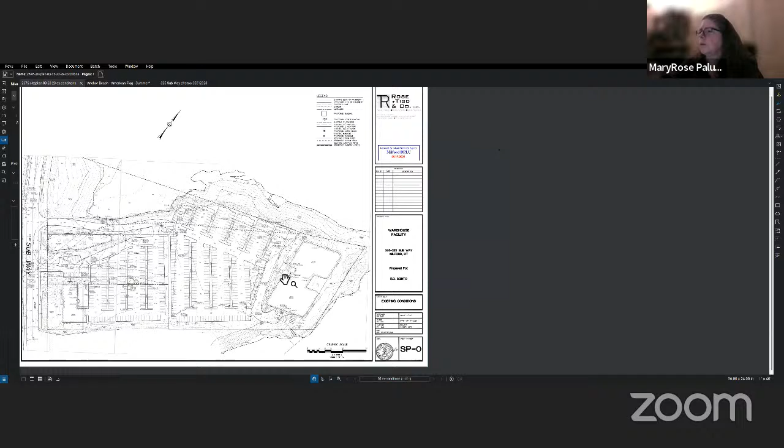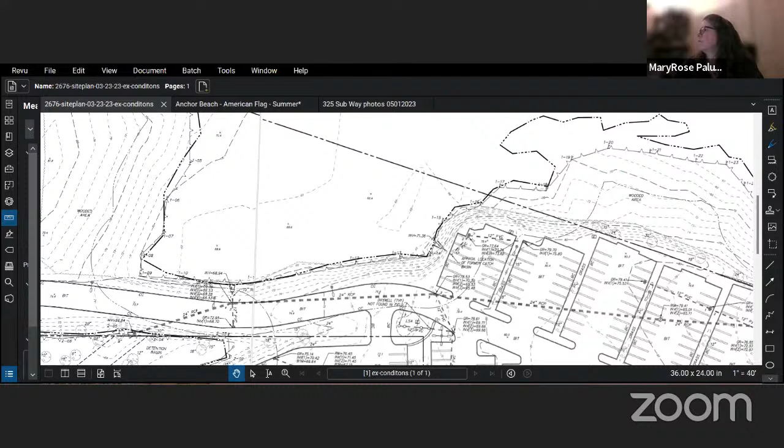Bob, we'll follow your lead, Mary Rose. Bigger, I think, yeah, I can't really see it. I don't know. Trying to get the screens arranged so you can see it. Is that any better? Yeah, that's okay, all right.

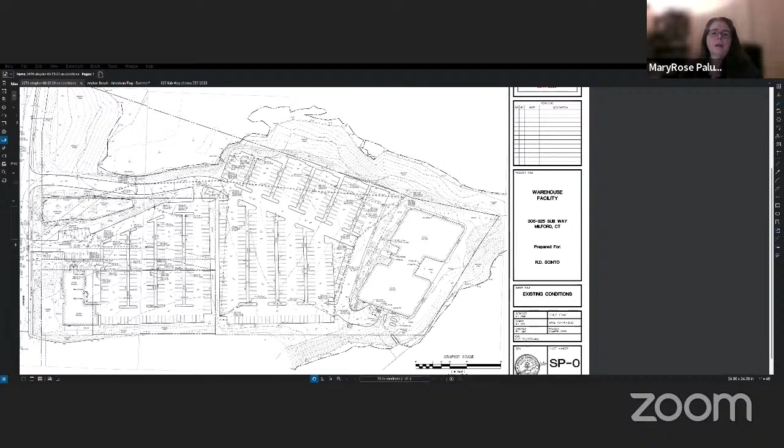All right, this is item D1, IW230030 Sub Way. Item D2, IW230029 Sub Way. And item D3, IW230028 325 Sub Way. These are three applications for one project that spans the properties at 305 and 325 Sub Way. The proposed project is for construction of a 160,000 square foot warehouse, sorry, I got the math wrong, with its proposed parking, associated grading and construction, and stormwater, within 150 feet of a wetland in the Beaverbrook watershed. The plan proposes to fill in approximately 0.223 acres of wetland currently acting as a detention area, and to mitigate that with a wetland creation. The application, site plans, and stormwater report are all in the document links on the plans and in the agenda.

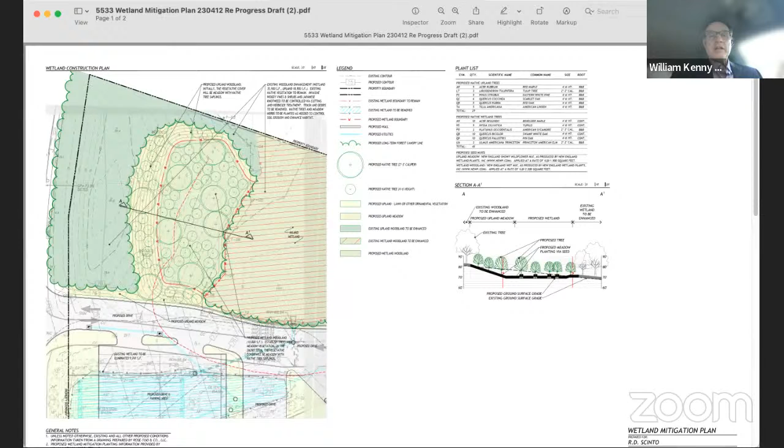However, to create that wetland, you need to essentially destroy the upland forest. So we are offering this as some mitigation, but there is another option for mitigation. We had a meeting with Mary Rose, Steve Johnson, and Jeremy to discuss that, and at your next meeting we will have additional information regarding it.

But the proposal is, rather than disturb this relatively nice upland forest, we would do work on the town open space property, particularly along the trail that circles the western pond of Mondo Ponds, the two ponds. The western pond is the smaller area—you have the larger pond on the right and the smaller on the left. There's a trail that circles that pond, and we walked that trail with Mary Rose, Jeremy, and Steve.

Bob Scinto also joined us on that walk and identified some improvements that could be done along it. There's at least one spot where you could use a new footbridge, and there are many areas where we could remove some invasive vegetation, and other areas where we could put down wood chips to make the path safer for passage. So before the public hearing, we'll provide you with more detailed information so you could compare that to the other mitigation measures proposed on site.

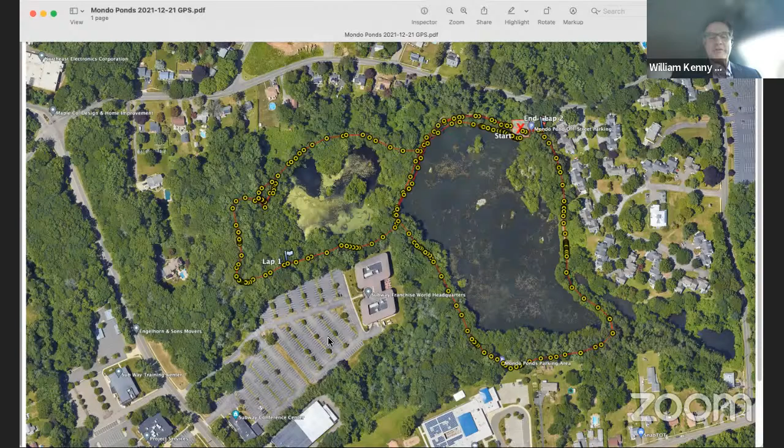And Manny from Rose Tiso can give you a more detailed description of the project development itself. Thank you, Mr. Kenny. Mr. Silva.

Good evening. My name is Manny Silva from Rose Tiso and Company. I'm a licensed civil engineer in the state of Connecticut, located at 35 Brentwood Avenue, Fairfield, Connecticut.

As Mr. Kenny explained, the site is an existing commercial site with a small building here in the corner, and then a large headquarters building near Mondo Pond to the east. Our proposal is to have a 160,000 square foot warehouse building with some parking near Sub Way, and then another employee parking area in the back, and one here to the north.

As he explained, there is an existing detention pond flagged as a wetland in this area that will be filled in. In its place, we're going to put underground storage with an equivalent volume to what this detention pond held, because there is some stormwater that comes from across the street and gets collected here, then discharged into the wetland to the north. So what we're going to do is mimic that condition with an underground storage gallery system, which will allow water to pool and infiltrate into the ground and into the water table, and also allow it to be treated through the media of the ground or soil that's there today, feeding the wetlands to the north and Mondo Pond to the east.

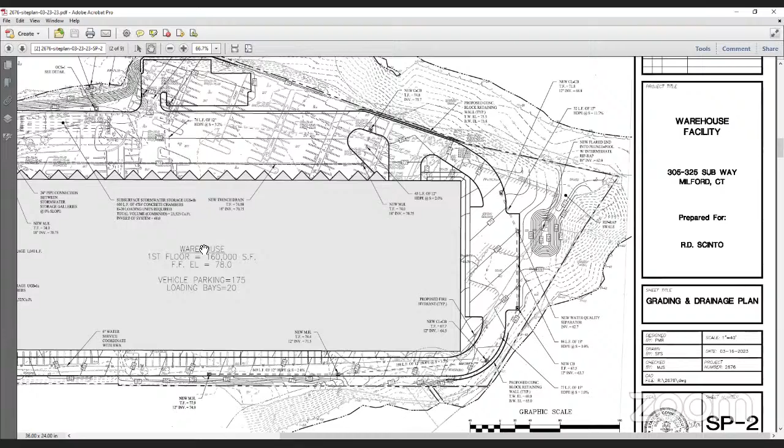And then it has an overflow, which is over land, and that will also go to Mondo Pond, similar to the hydrology of the site currently. So we're trying to mimic the hydrology of how Mondo Pond gets fed and spreading it out throughout the site. But we are collecting it, storing it, and then infiltrating it.

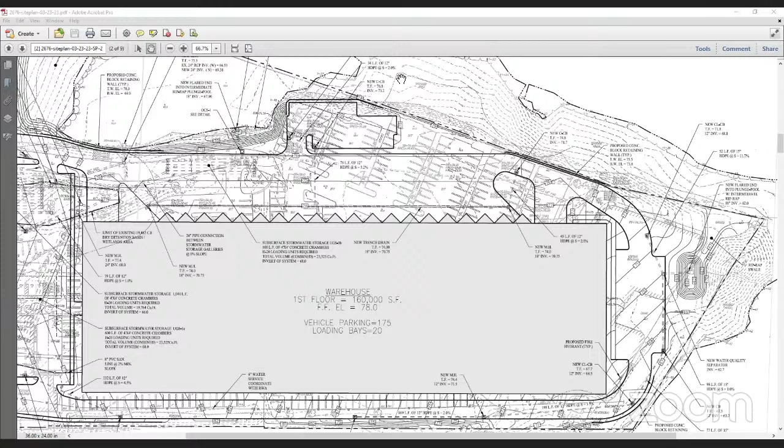As for how the numbers work, as you can see in our drainage report on page 5, we have a summary of our peak flows. To reduce floodwaters downstream per the regulations in Milford and the state of Connecticut: for the 2-year storm, we've reduced the stormwater runoff from the existing condition by 31%, the 5-year storm by 37%, the 10-year storm by 36%, the 25-year storm by 22%, the 50-year by 12%, and the 100-year storm has been reduced by 6%.

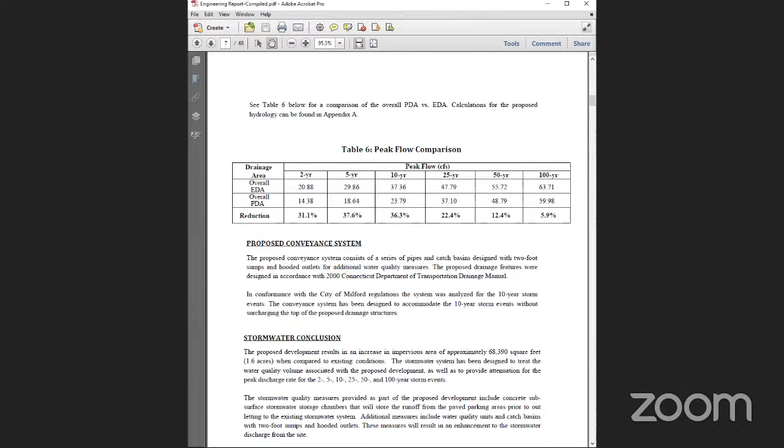Going back to the site plans here. During construction, we have to be conscious of protecting the wetlands and surrounding areas while the site is being disturbed. SP3 is our soil erosion control plan.

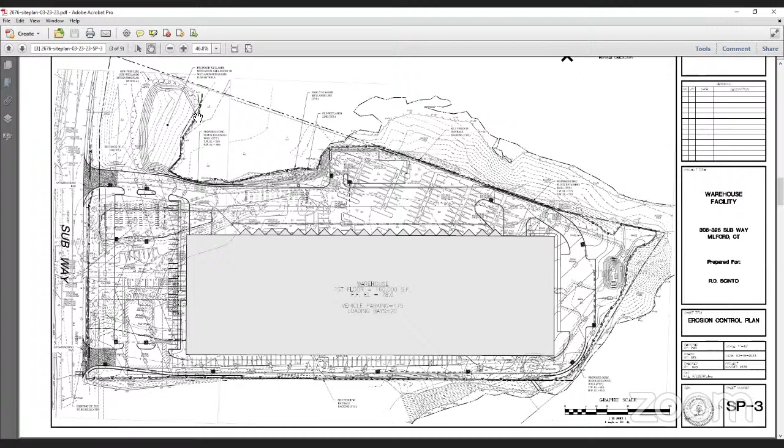That basically has some reinforced silt fence right along the edge of the wetlands and our property line. That's a silt fence with a hay bale behind it to help structurally hold it up so it doesn't get blown over, or pushed over in heavy rain, so the silt fence stays in place.

Also, we have 2 anti-tracking pads, which are large stone mats—when vehicles like dump trucks drive off into Sub Way, the mud gets knocked off the wheels and won't track into Sub Way, so we avoid getting silt or dirt into the town drainage system there.

Also, once our drainage system is in place, we have silt sacks on all our new catch basins prior to any kind of stabilization. That's basically a sack of silt fence material that goes into the catch basin, so muddy water from an unstabilized site gets its mud and debris collected in that sack. Once the site is paved and vegetation is established, we take out the sacks, and the system will operate day one, clear and clean of contaminants or dirt, ready to go as designed.

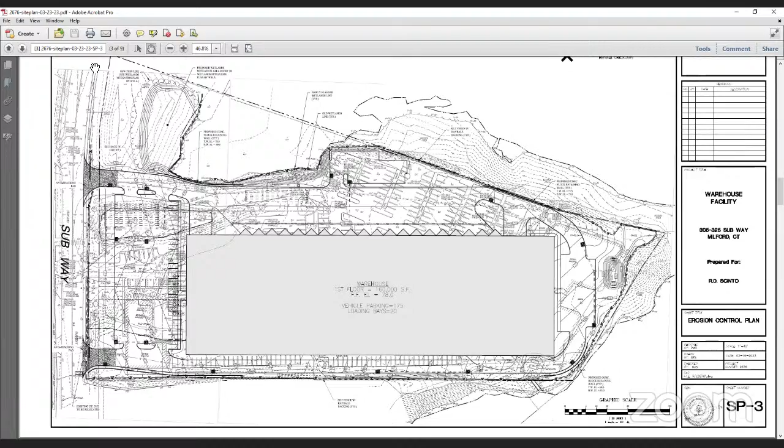There's also a landscaping plan—right now an ornamental one, but I think there's going to be more work done on this. Currently we have some shade trees along Sub Way on SP4, low ground cover at the base of the building, shade trees in the islands, and evergreen screening trees along the south property line. There's a detailed planting plan in Mr. Kenny's mitigation plan, which I'm sure we'll go into more detail on in the meetings going forward.

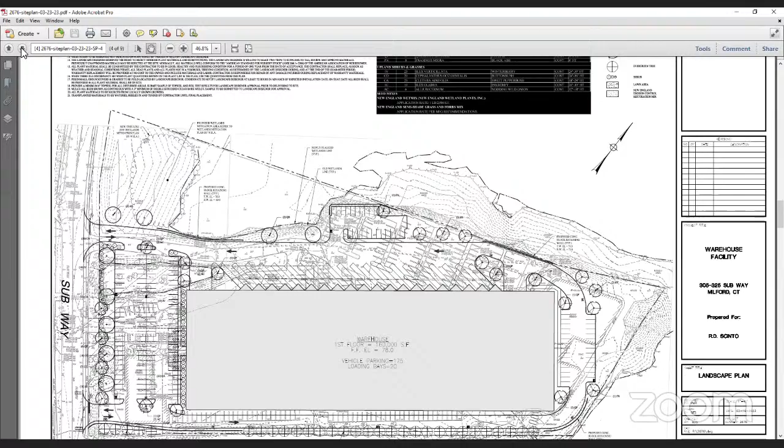SP5 is our lighting plan to ensure there's no light spillage into the wetlands or into neighboring properties. We have point-to-point analysis, so each point will show how many foot candles will be illuminated in that area. As you can see, we're using LED dark sky compliant fixtures. Usually there's a section here, but I'll get to that.

SP6 is our soil and erosion control details.

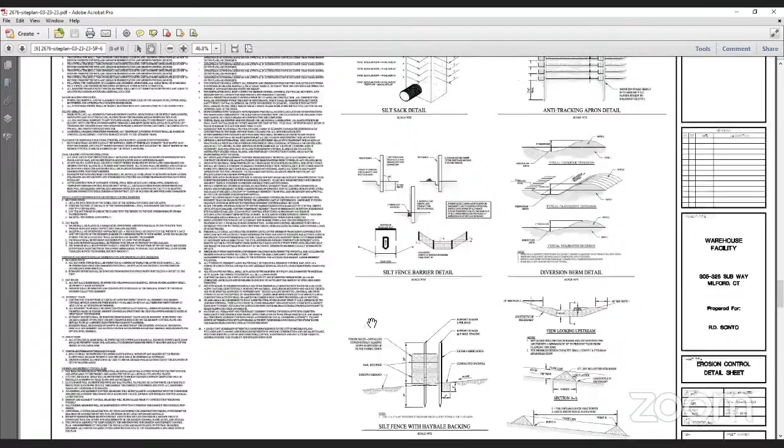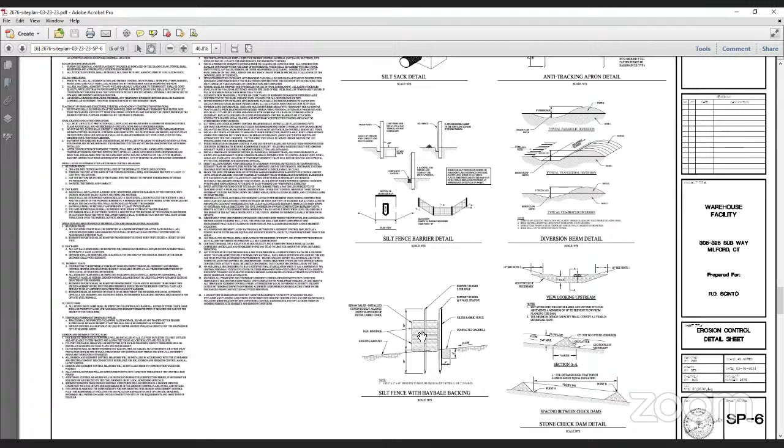Here's that silt sack detail where debris gets caught in the silt sack during construction until things are stabilized. Then we remove these and the system will be free and clear. Here is the detail of the reinforced silt fence we're going to use. It's basically a silt fence on the development side, with a hay bale staked into the ground behind it to hold it up structurally.

SP7 is just some standard details on curbs and signs and things of that nature relevant to zoning.

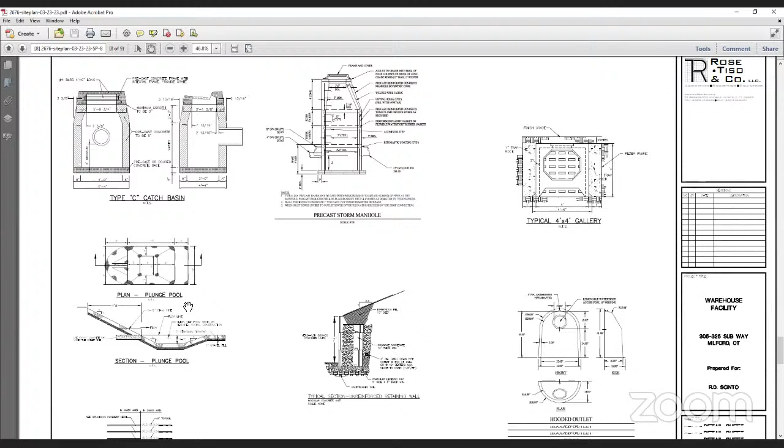SP8 shows basically our plunge pool for discharge into our overflows from the gallery system, which will be minimal, as we can see in the calculations. And then we're putting hooded outlets on all our catch basins, to supplement our treatment train. So when water goes into the catch basins, any floatables, oils, bottles, things of that nature get caught and stay in that catch basin, and don't go downstream.

Then it goes into a vortex unit, which is a swirl concentrator unit that will further remove smaller suspended solids and any other floatables that might continue on. From there it goes into either the gallery system or the open retention pond, where the water will be infiltrated into the ground and further treated that way, recharging the groundwater.

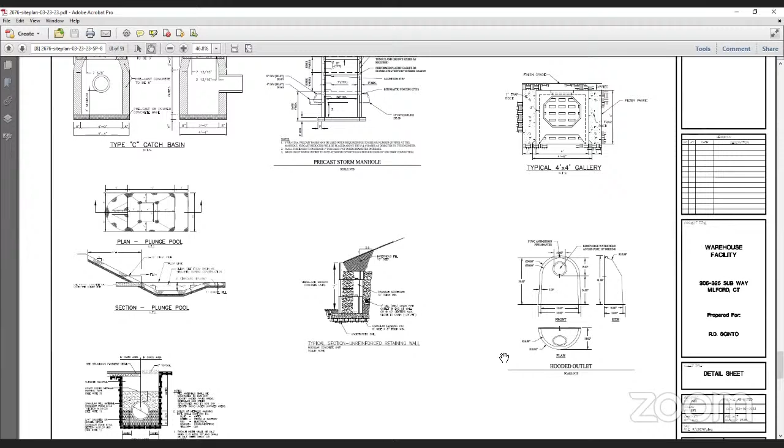Again, there are some other details here just for construction. Here's the soil concentrator unit that we selected. Water comes in, swirls around here and slows down, then suspended solids drop to the bottom, and any floatables get caught in the outside ring. Then water comes up and flows out from the center, and that water will be relatively clean, down to something like 2 microns. It removes solids down to that size.

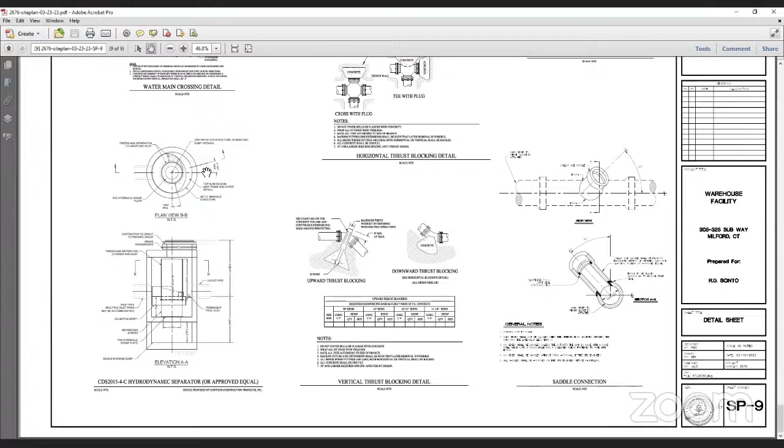I think that's it for my presentation. I'm trying to keep it brief. If you have any questions, please feel free. Thank you for your time.

Thank you, Mr. Silva. Any other remarks from the applicant team before we move on to questions?

Mr. Chairman, it's Kevin Kersaden. I don't think so. I know Mr. Kenny may not be present for questions right now. I know he had another meeting to go to, but we can try to answer them if they're somewhat related. Okay, thank you.

At this time, as this is the first presentation, we can ask any questions. We can discuss the merits of scheduling a site walk. We can request additional information. What would the agency like to do?

I think a site walk would be in order. Yeah, I believe so too. Mr. Munson? Yes, Mr. Chairman.

Hold on, there we go. I'm not quite clear about something on the map. I agree with Jim, by the way, that we should have a site walk. The map's too small, and I wasn't able to open them on my computer because something's wrong with it.

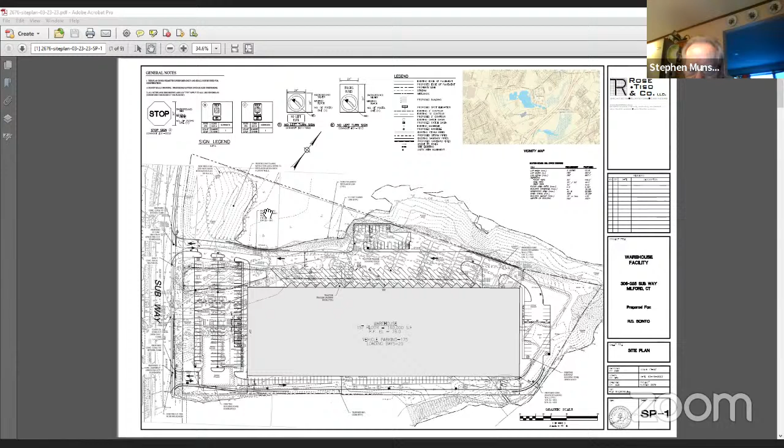I'm not quite clear where the wetlands lines are. Could you just take a pointer and show me where the whole thing is here? Good question. And Mary Rose, I believe you can do that, or I can try. Hold on, let me just try. Okay, go ahead. This is Manny Silva again. Let me just try here.

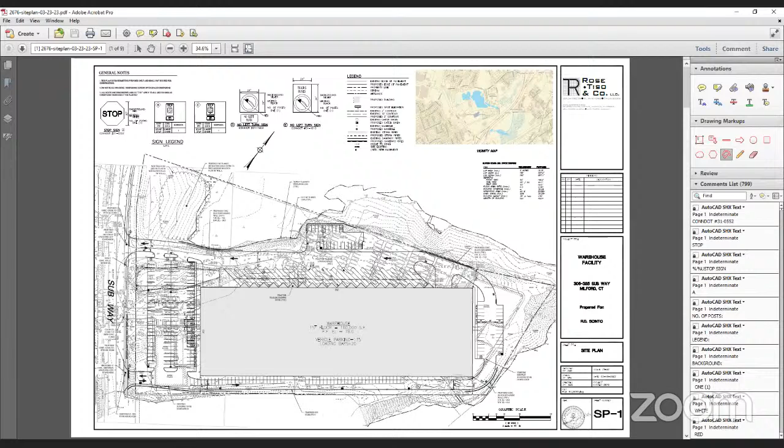Thank you. So the wetland line, I'm going to mark it in red here. Hopefully you can see that. If not, let me know and I'll make it thicker. So there's a wetland line here. I'm doing my best. Close enough. Okay, it kind of follows this line here, as you can see. It goes around. I'm going to skip these little zigzags really quick. Then it comes around here, leaves the page, and it's right here.

And then there's another one, the retention pond. Let me try to get that. Right there's an existing retention pond that was flagged as wetland. I understand that.

Okay, so everything inside of that line is wetlands? In here is wetlands, and then everything outside of it. So the wetlands goes away from here. Okay, yeah, I just want to be clear about it. You said inside is wetlands, outside is not. That's correct.

Thank you. Mr. Chairman, I have a question from Mary Rose. Mary Rose, when was this building, or this parking lot, originally built? The building was built before I was here, so that's greater than 30 years old.

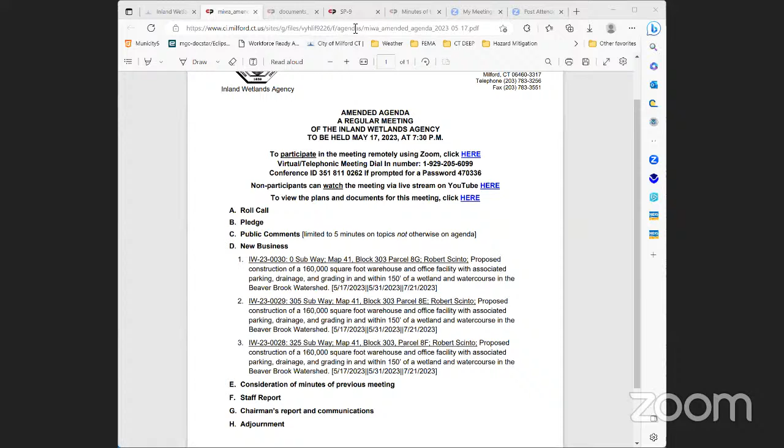Okay, now the parking that exists there. I don't have an existing conditions map in front of me, but I'm trying to get it.

Go ahead with your question, Mr. Munson. Well, the question is, was all that parking originally put in when the buildings were first built, or was it added in later?

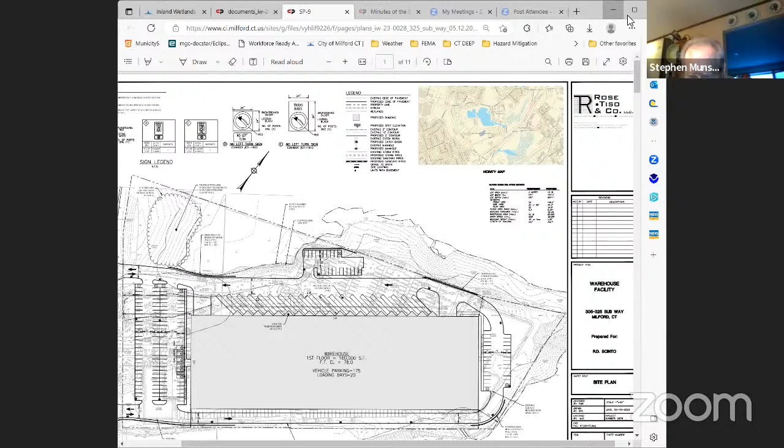Mr. Munson, this is Kevin Kersaden, I can answer that question. I have some benefit of historical knowledge, having worked for the legal department there in the early 90s. To answer your question, I'd say about 80 to 90% of that was paved in the early 90s. They did add some parking maybe about 10 years ago, between the main headquarters building and the building originally used for training new franchisees that fronts on Sub Way. So there was probably an additional 10 or 15% of the property paved more recently, but the site had been pretty substantially developed right from the initial construction.

Okay, so what we are now basically looking at here is a warehouse being placed in the middle of a parking lot. Basically that's what we're doing, right? That's more or less fairly accurate. It's not exact, but okay.

Last question: what is the change in impervious surface, approximately, on this plan from what exists? This is Manny Silva from Rose Tiso. It's just under 1.5 acres of change.

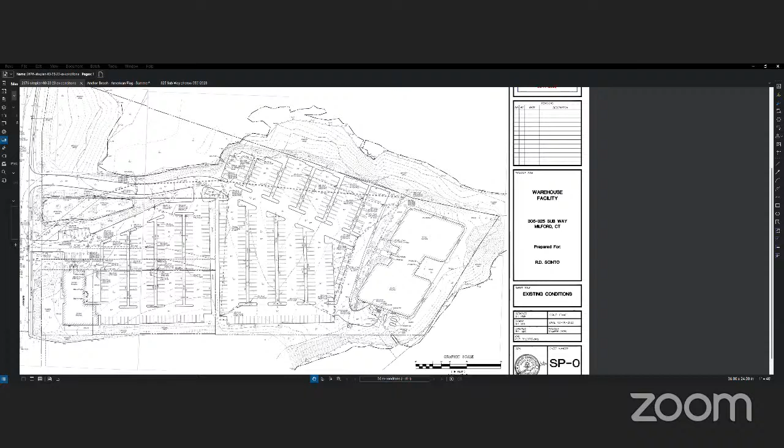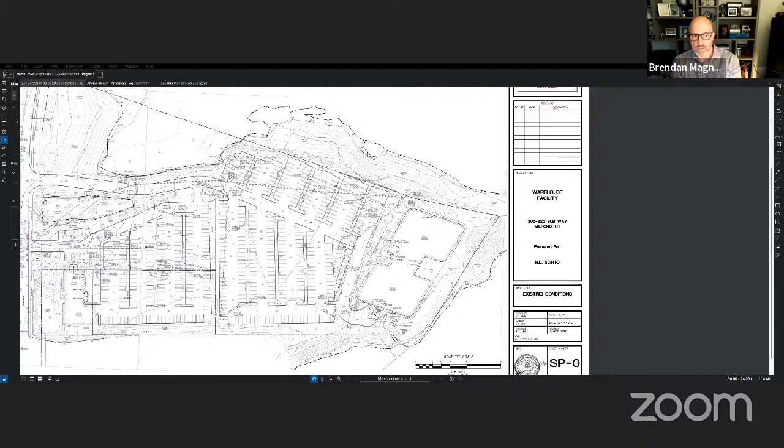Thank you. And along that line, perhaps directed to Mr. Silva, on the proposed design of the warehouse and parking areas, two-part question. One, are there fire apparatus roads that need to be contemplated for emergency fire equipment purposes? Is that already factored into your plan, or are you having to cope with that as part of the process? And how does that relate to the adjacent wetlands? The second part is, where is your snow shelf plan? Where are you intending to deposit snow when it snows?

Manny Silva again. Yes, the fire apparatus was taken into account, that's why we have these swoopy curves going around the building. So our fire lane is basically from Sub Way coming around the building, and this is where the fire trucks can come in and out. We have the turning radiuses - we use turning templates for your largest equipment in Milford, so we can show it can come around the building. It's also going to have to circumnavigate shipping trucks, which have the same kind of turning movement.

As for the snow shelf, we have ample areas here in the front, along this area, and here to store snow. But if we have large snowstorms, like 2 to 3 feet, which are irregular in Connecticut but do happen, that snow will have to be trucked off site by the property manager, which in this case would be RD Scinto. He has many properties throughout Connecticut and they do the same thing - when the snow storage areas become full or need to be cleared, they load up some triaxles and move it to designated melting areas where they pile it up and it melts over the summer.

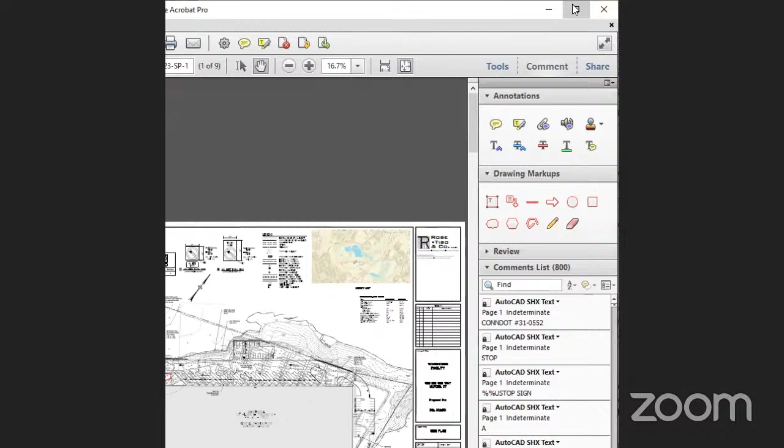That's actually another question I had. Is there any way, Mr. Silva, you could show the proposed footprint of the warehouse as an overlay to the existing conditions? Yes, it's kind of shown that way now, just because of the hatching on the building, but I can try to outline it quickly again. Hold on, my Zoom thing gets in the way. So the building is actually here, it's this thing here - that's the existing building. The hatch is in the way, but it's kind of like this, I think. That's the one building, and then the other one is right here.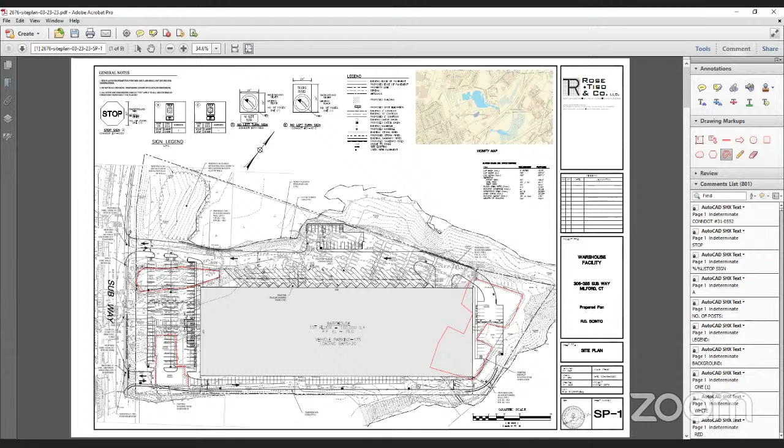Okay, that's helpful, thank you. Mr. Connors, did you have another question? No, that's it. I'm sure there's other questions, Mr. Munson.

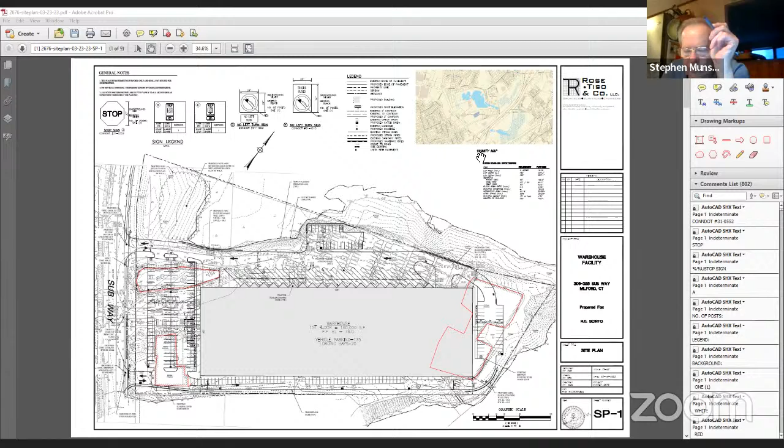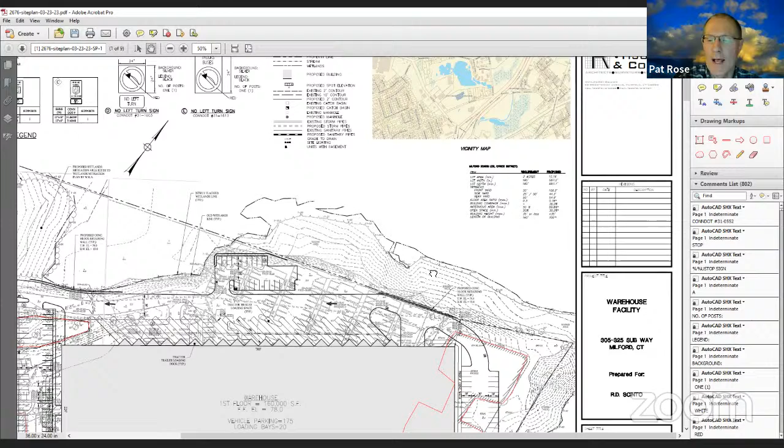Yeah, I'm just wondering how tall is this building - 2, 3 stories? I assume it's a large open space, but 2 or 3 stories? This is Pat Rose from Rose Tiso & Company. The building will be a maximum of 45 feet high. Okay, sloped roof? It's one story. Yeah, it's a 1-story building, but it's a warehouse, so it's big and open. So, with a sloped roof or a flat roof? With a relatively low slope roof that will slope from the loading dock side back to the south of the property, away from the ponds. Correct. Okay, correct. All right.

I also have a couple of questions about the loading docks. Are there going to be vehicles left overnight, either at the loading docks or somewhere else on site? I'm thinking mostly of trucks. I would assume the trailers would be there overnight. Well, I'm trying not to ask anything that would need you to give proprietary information, which obviously we're not. Right.

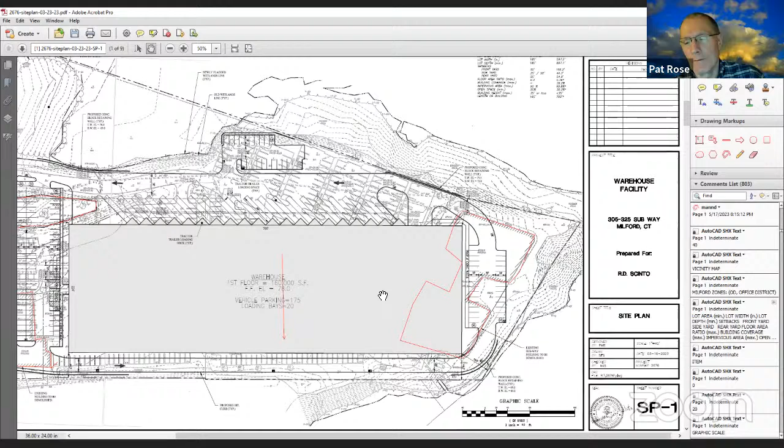My concern is always leakage from vehicles that sit overnight during the day, what kind of vehicles they are, oil, all that kind of thing. They're going to be getting onto tractor trailers. The trailers have nothing that's going to leak, and the tractors, if they're leaking anything, the DOT wouldn't let them on the highway anyway. Yeah, it will be tractor trailers, and we can find out specifically from the tenant whether there will be trailers left there overnight. That I don't know the answer to at the moment.

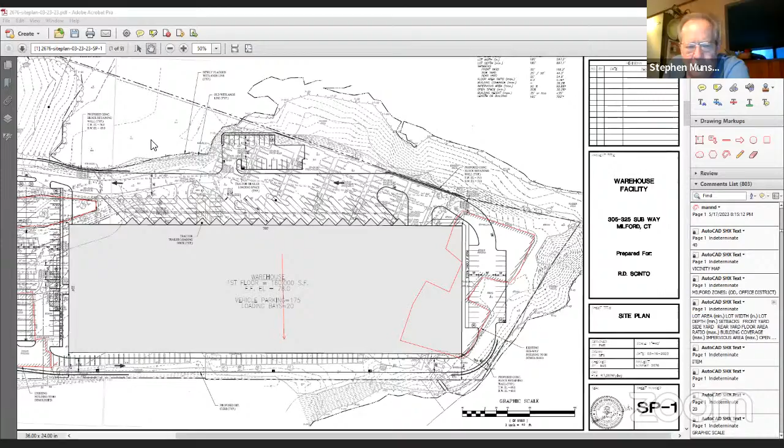Just because that may require somebody to look after making sure that there isn't a lot of gathering of pools of leaking oil or transmission fluid, that kind of thing that you don't notice but comes out sometimes. Yeah, and you normally wouldn't leave the tractors because they always want to be moving to make money. I would assume that. I just wanted to make sure because I know there's no parking facility there, obviously. That was just kind of a thought.

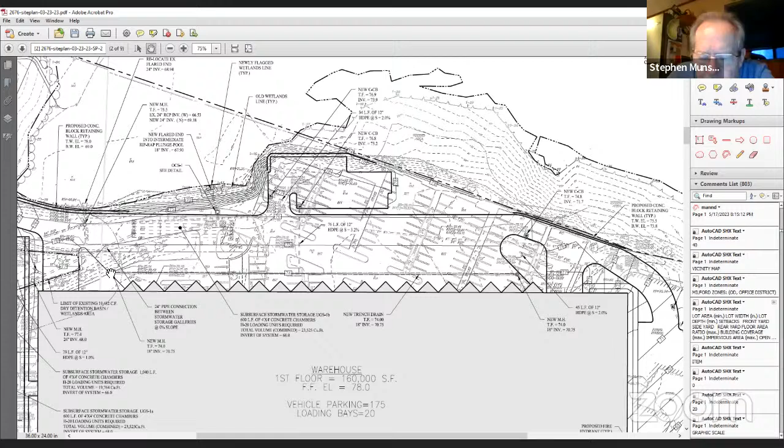Manny Silva, the civil engineer: the area where the trailers park will have a long trench drain picking up the drainage from them. And then what we have after this trench drain is an oil water separator, or water treatment structure. Is that this long straight line in front of it? That's a trench drain in the area of the loading docks.

And then that goes to a water treatment structure right here. That will get all the oils and things caught in it, and then that will be pumped out. The oil gets inspected and pumped out every six to twelve months. And then the clean water, once it's been treated, goes into this underground gallery system. So there's no direct connection to the wetlands from any drainage that comes off the tractor trailers. And that's why we've sloped from the wetlands back to the building - somebody thought of that. Correct, yes.

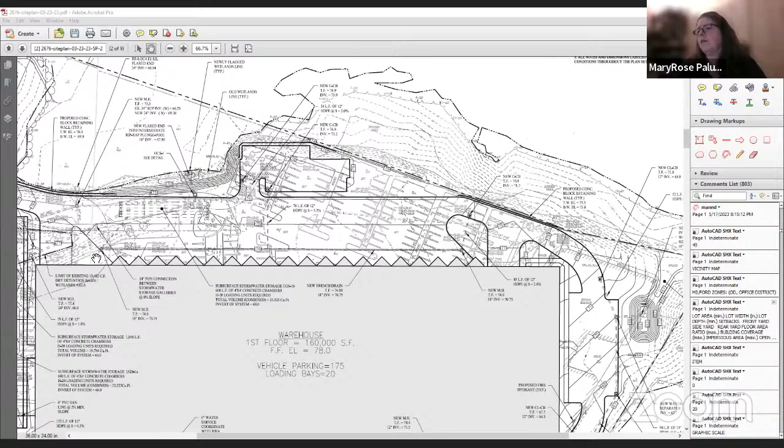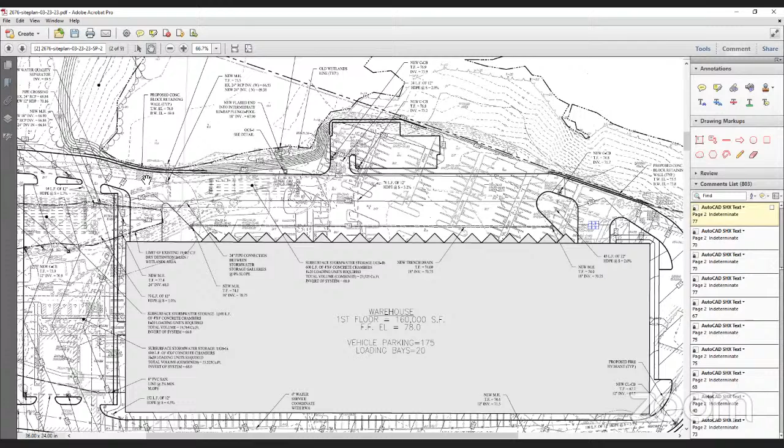Through you, Mr. Chair: can the consulting team submit the stormwater management plan that's going to be part of this to ensure that the property owner is going to do that maintenance every six to twelve months? Yes, we can prepare a maintenance and operations manual for your approval. Mr. Chairman, if I may also add, if that obligation is passed on to a potential tenant, it should also be specified in the lease. That's an option.

Any other questions? I'm just saying, if the property owner has an agreement with a tenant that they will see to that - very often tenants are responsible for some maintenance, and if so, that should be specified in a lease. Mr. Munson, I think your point is well made. We can make sure that's a condition that flows down to the tenant. Any other questions for the applicant at this time? It's not a question, it's just making sure all bases are covered.

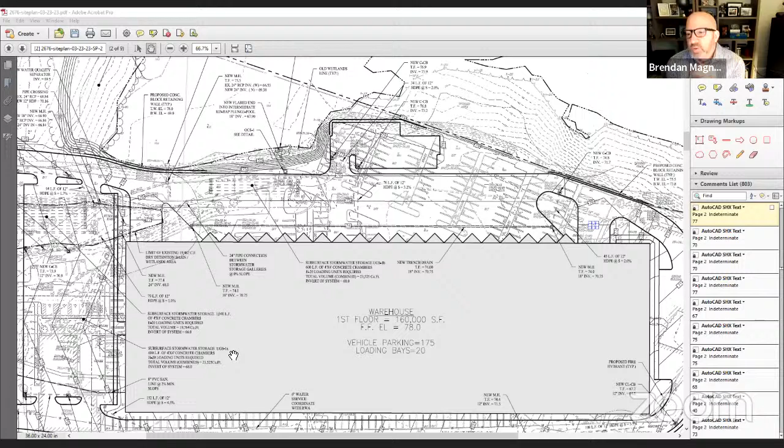It's noted. Any other questions? Do we have any other questions or any other information we need from the applicant? This is a large application, so a lot to consider.

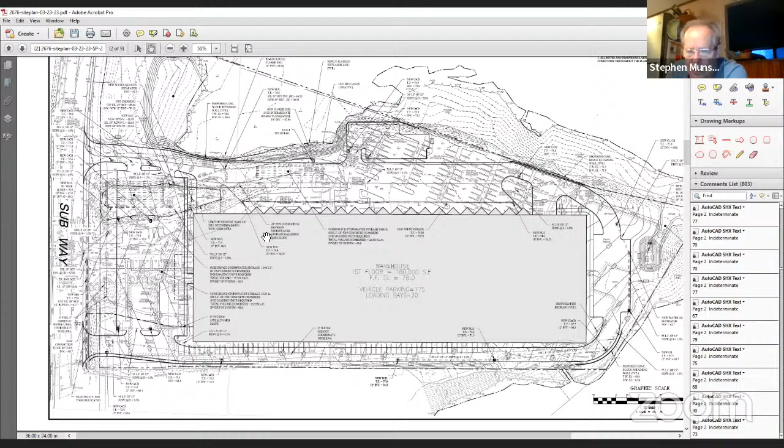Mr. Chairman, Mr. Munson: Mr. Connors brought up the idea of a sidewalk. I agree. I think also, typically what we do when we fill in wetlands is we have a public hearing - I think we always do that. Agreed. One last question: have you heard anything from the general public on this? Through you, Mr. Chairman, no, we have not received any inquiries from the public about this application.

Mr. Crusaden, I would like for the next presentation a little bit more critical thinking from your wetland scientist, Mr. Kenny, around the alternatives that you've considered. Typically, to Mr. Munson's point, anytime a wetland is destroyed, there's a four-to-one ratio of new wetland created that we look for. So while I appreciate the general idea of enhancing certain features in the public area, I'm not sure that's sufficient mitigation for the destruction of the wetlands. I don't have a premonition, but I'm not convinced that that's sufficient based on what I heard today.